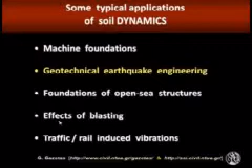Now, some typical applications of soil dynamics. Machine foundations, perhaps one of the oldest applications of soil dynamics. Geotechnical earthquake engineering, the topic of my presentation, but many other applications like foundations of open sea structures, blasting, traffic, rail-induced vibrations, and so on, are part of soil dynamics, but geotechnical earthquake engineering is by far the most significant one.

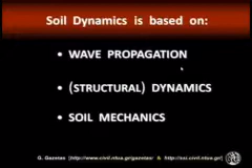Now, soil dynamics is based on 3 sciences, if you want to call it that way. Wave propagation, which is basically the dynamics of continuous systems, like soil is, structural dynamics, because eventually it is our structures on top that will interact with the soil, and it is their behavior that is of our interest, and of course, soil mechanics.

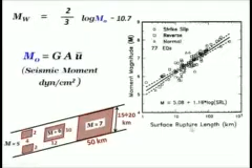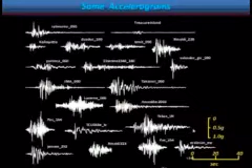Now we go back to see what are the consequences of these ruptures on the surface. First, starting with the ground shaking, the accelerograms that are recorded on our accelerograph stations. I have here a tremendous variety, arbitrarily chosen, of earthquakes from here and there. Ground motions with different amplitude, different intensity of motion, different duration, and of course different details of the motion, or frequency characteristics, as we like to call them.

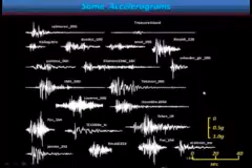These frequency characteristics are usually represented by engineers with the response spectra of these motions. Seismologists prefer the Fourier spectra, but the response spectrum is of more practical use to civil engineers. A response spectrum of a particular ground motion could be in principle understood as if we had a rigid, huge table, on which we had a number of oscillators. Each oscillator has a fundamental natural period, which is 2 pi times the square root of m over k.

Each oscillator, because of the larger length of this bar, which means smaller k or larger period, has a period which corresponds down here to this diagram. If we subject this plate to this particular time history, these various oscillators will respond very differently in frequency characteristics and amplitudes. If we only take the maximum values of each acceleration and plot them versus each period, then we construct the nearly elastic response spectrum. It's not truly elastic because we usually have a little damping. Typically we present these spectra with 5% damping, but it is in essence a linear elastic spectrum.

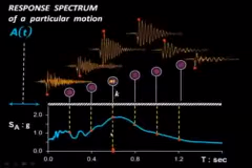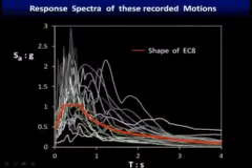For example, this particular oscillator with this period experienced this maximum value of acceleration. We plot it here. So this is the spectrum. Now, if you want to see the response spectra of all the recorded motions that I showed you before, you can see that these spectra can reach very large values, 2g accelerations, over a very wide period range. And I have here a typical design spectrum from the codes, in this case Eurocode 8, the European code, but more or less all the codes are similar, which would have given something like this. So that's the ground shaking.

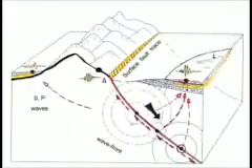Let's go to finish with the consequences of surface fault rupture when the fault appears on the surface: what's happening, how our structures behave. Let's see a few examples. I have taken the example from the Chi-Chi earthquake in Taiwan, a very strong earthquake, magnitude 7.5 or so. What is peculiar is that the fault, a very substantial fault, not only reached the surface, but gave huge displacements, as you will see in a while.

First of all, it's anything but a straight line, evidence that reality sometimes is much more complicated than a simple nice plane that we draw. In this particular case, this was a thrust fault, meaning a fault produced by compressional tectonic forces. And because of this compression, the right-hand side part of the ground moved upward. How much? 7 to 10 meters in this particular location.

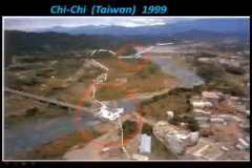Smaller heights, smaller offsets in other locations, but in this particular case, let's see what is happening here and there. But notice, it is very important, how unpredictable the location of this fault was. They did not know it ahead of the earthquake. Yet this earthquake, first of all, because of the upward movement here, created these faults, 6 meters, and of course the abutments of this bridge moved upward, and this bridge, being a simply supported bridge, could not escape the fall of the decks.

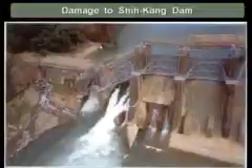But let's go to see what is happening on the other side. On the other side, the dam. Yes, the dam also was broken. This concrete dam, not a very large, not a very major dam in height, ruptured. This distance here, this differential height, is 9.5 meters.

But it was a fortuitous event that this part moved upward rather than downward. And upward means that the lake was contained. The water escaped through the broken spillway, which is what it was here. You can see here the gates of the spillway. Okay. But there was no other disaster. But let's see other cases.

In China, 2008, there was the Wenchuan earthquake, also a large magnitude event with many victims. The important thing is the rupture also appeared to the surface. Not so large displacements, not so large offset, as we call it, but 2 to 5 meters is enough to dislodge this part of the bridge, the decks of the bridge here.

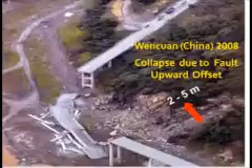But there have been also successes next to the fault, and it is very important for geotechnical and civil engineering, that even a 2.5 meters rupture very close to a school did not damage it at all. This school is intact, 2.5 meters displacement. It was in the upper part of the fault, the moving part of the fault, the hanging wall, as it is often called, only 2 meters away, but no damage at all. Contrary to what happened to the other buildings, we don't know whether they ruptured because of the fault appearing on the surface or the shaking.

But the most interesting and significant interaction, if you want to call it, between a rupturing fault and the structure is this one from Turkey, from the Izmit or Kocaeli, as it is called, earthquake, where this very well constructed village building, well, what happened here? It underwent a 2.3 meters fault rupture appearing on the surface. But this fault made a turn around the building. It was deviated. It moved because of the presence of the building.

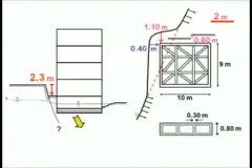So, after all these successful and non-successful events, we have understood that we can possibly design structures, not on purpose, but just in case a fault ruptures underneath. And here is an example of a typical numerical analysis of a tall building, 5-story building, but on very strong box or mat foundation, which in this particular case undergoes a very significant 3 meters dislocation at the ground, at the base, and manages to almost escape from this. Of course, it suffers a significant rotation, but if you can see the columns and beams, there isn't much distortion in the structure itself. It would have survived even if not intact during the earthquake.

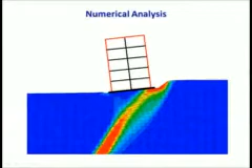So that's the story with the fault rupture. We believe that the engineering profession is in a position to design for at least a hypothetical fault rupture underneath. Of course, we're not crazy to go and put a building directly on a well-known fault, but usually faults that rupture during earthquakes are not so well known.

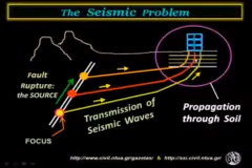So let's proceed with the most important part of my presentation, which is how we handle the seismic shaking, the ground motions. And I have here, again, this overly simplified and out of scale sketch of a source, which may be of the order of tens of kilometers in this distance, more than tens of kilometers in the other direction, and the waves emitted every time a part of the fault ruptures or slides one part over the other, and those waves eventually arrive in the location of our interest, the structure and the soil through which the waves propagate. This propagation through soil is what gives the term soil amplification.

I have it here in a different sketch, similar sketch, the fault rupture, to show that there is a plane rather than a single line. The waves emitted produce motions within a very short distance, like even a neighborhood of a city or a small village or a town, which motions at three different points with different thickness or properties of the soil may experience quite different motions, different in amplitude, peak values, PGA, PGV, but also different, as you can see, periods of oscillation at these points.

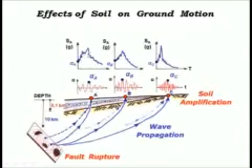And this we usually express again through the response spectra, which then show that not only the peak values of acceleration, but also the peak values of the spectral accelerations, the accelerations that a structure will experience, differ in terms of the period where these peaks occur. So this is, in broad terms, soil amplification. It is produced by the propagation of seismic waves through the soil.

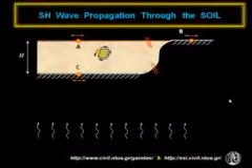Now, here is how it is produced. A very simple picture shows that the waves propagate vertically upward, and as they enter the soil stratum, they produce simple shear in the soil. Now, is this vertical shear wave and horizontal ground a good assumption? A very reasonable, simple way of seeing the earthquake. Yes, the earthquake is predominantly shear waves. Why? Because the source is a shear failure, a shear rupture. So it is predominantly shear waves that emanate from the source.

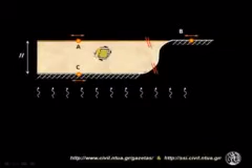And then do they arrive vertically or under an inclination, under an angle? Well, there is the so-called Snell's law of refraction. You may remember it from optics or your high school physics, that as the wave progressively moves under a certain angle and hits interfaces where a weaker layer is on top, it becomes closer and closer to the vertical. So this idea of vertical shear waves producing simple shear motion in the soil and eventually giving an amplified motion at the top is what is really the soil amplification.

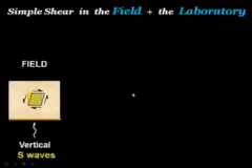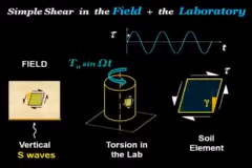Now, if we want to model this in the laboratory, we have to impose purely shear waves. This we'll usually do with torsion in the laboratory or with simple shear devices, and we study the behavior of cyclic shear stress versus the resulting shear strain, and we eventually construct loops like this. Loops which mean energy loss during a complete cycle of motion. Now, upon loading and unloading and reloading, the soil follows this particular path from here to here and to here.

We understand that the shear modulus at small strains, what we might call the elastic shear modulus, or Gmax as we call it in soil mechanics, is not really representative of this complete cycle. What is more representative is this sort of average shear modulus. Not the maximum nor the minimum, the average. It's the slope of the line which connects the center, the zero, with the tip of this loading and unloading curve.

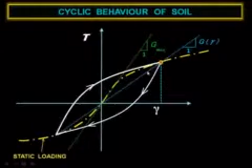So with this average shear modulus, we do linear analysis. We like linearity because it's much easier to do, especially in the old times where analytical solutions were the rule of the game. But even today, we prefer analysis with a linear modulus than with the complete nonlinear stress-strain loops. But it's a pity not to account for this energy loss. Well, we do account for this. This energy loss is accounted for through this damping ratio.

Now, they call it critical damping ratio, but this is totally terrible. There's nothing critical about this damping ratio. It is the hysteretic damping ratio. We'll see where the word hysteretic comes from. But the damping ratio associated with this complete cycle is proportional to the area of the loop and inversely proportional to the elastic energy, which is nothing else but this area here, and divided by 4 pi.

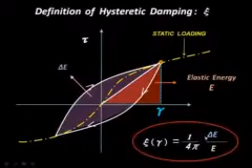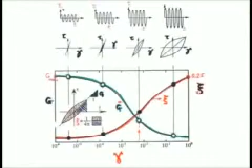And the interesting thing is that these curves, G versus gamma, and I'm sorry, I changed the symbol, and Xi or beta, or whatever else it's called here, damping ratio versus gamma, are almost unique functions, do not depend on many other things, for example for clays, other than the plasticity index. Very nice, a very easy thing to measure, not many other things, not overconsolidation ratio or the nature of the soil. Plasticity index is the one which controls the G gamma and beta gamma curves.

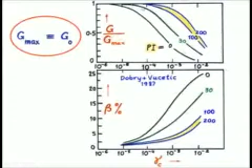Very significant, meaning once we have G max measured in the field, for example, through shear wave velocity measurements, we can have the G versus gamma knowing the plasticity index of the soil.

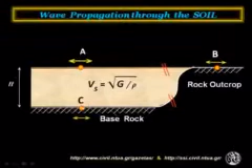Now, let's go back to see some case histories which will verify this idea of vertical shear waves and the amplification that is produced, which is the ratio of displacements or accelerations at top versus the base, I'm repeating here, A and C are these 2 points. As the waves go up and down here, they eventually produce a motion at the top which is much higher than the motion of the base.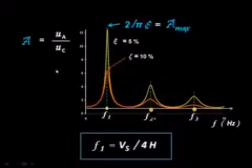So this is the fundamental, simplest possible theory, and we'll see how this theory has been verified by a most significant earthquake event. The earthquake event is none other than the destruction of part of Mexico City, the capital of Mexico, during the Michoacan earthquake, as it is called from the name of the area here in Mexico, which occurred in the subduction trench, where this part of the ocean moves underneath that part. It was a large, 8+ magnitude earthquake, and it produced huge destruction here. Let's see it in more detail.

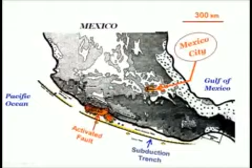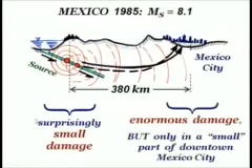For example, here is a very artistic, so to speak, picture, of course completely out of scale. Nearly 400 kilometers away from the source of the earthquake was the city. Strangely enough, there was surprisingly small damage in the so-called epicentral region. For an 8.1 magnitude, really surprisingly small damage. But enormous damage in Mexico City. Nearly 20,000 deaths. But only in a very small part of the city. A very surprising thing.

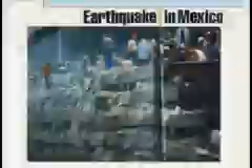Now let's see what destruction meant. The picture here from National Geographic says it all. You can see why 20,000 people died. If you recall that the buildings that collapsed, this pancake type of collapse, were typically 10 to 15, 17 stories high. You understand? If a 15-story building falls like this, the number of deaths will not be insignificant. It was nearly 20,000 deaths.